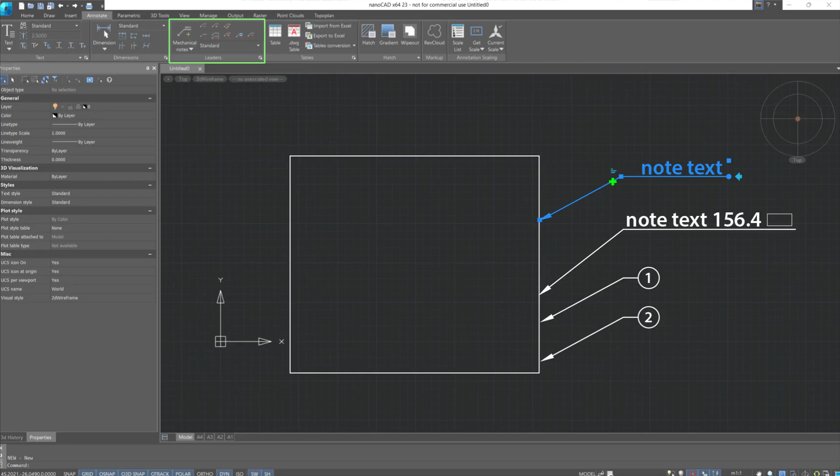Mechanical notes are a mandatory element of drafting. They appear as mechanical notes of an element, containing specific information about a certain part of a structure or construction. Let's examine the main functions of mechanical notes provided by the NanoCAD program.

We'll also create a multi-leader style and identify key functions in the Mechanical Notes editor. The first Mechanical Notes button offers 8 positions. Each of them has its name and a depiction of how they will look on the drawing.

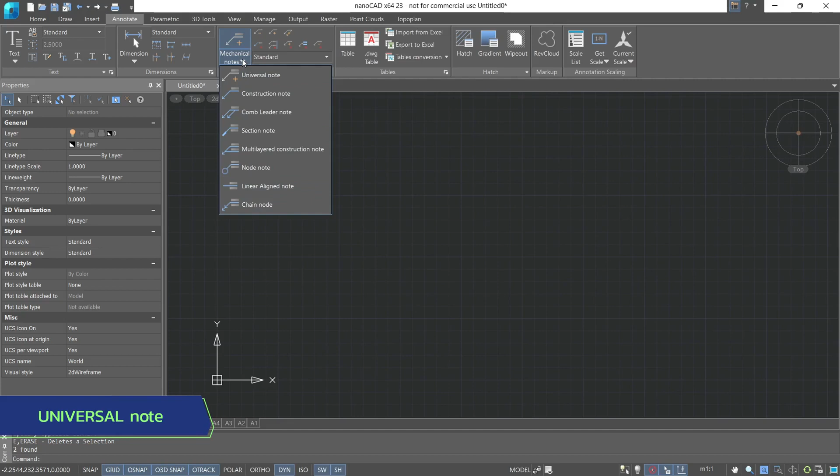Basically, the name of each sign speaks for itself. We'll first use the universal note. Let's arbitrarily construct a rectangle.

Call the universal note, after which the following dialog box with function settings will open. Settings like Add String, Remove String, Simple Note or Multiline Note, Frame, Types, Arrow Formatting, Text alignment, and additional tools, for example, Insert Special Symbol, Notebook, Match Properties, and Add Extension Line.

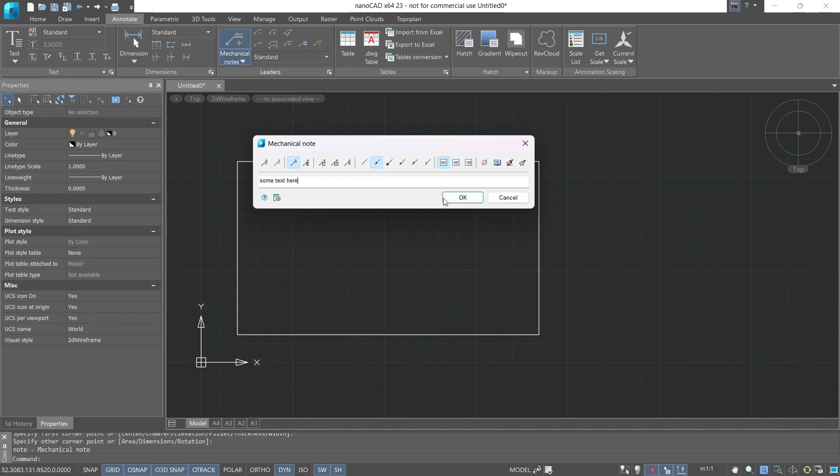Let's write the text in the field. Then we'll specify a point for insertion on the object and continue editing.

The Mechanical Notes contains a rather extensive list of editing grips. The first of which allows changing the type of arrow. Next, we can add Mechanical Notes lines using this plus.

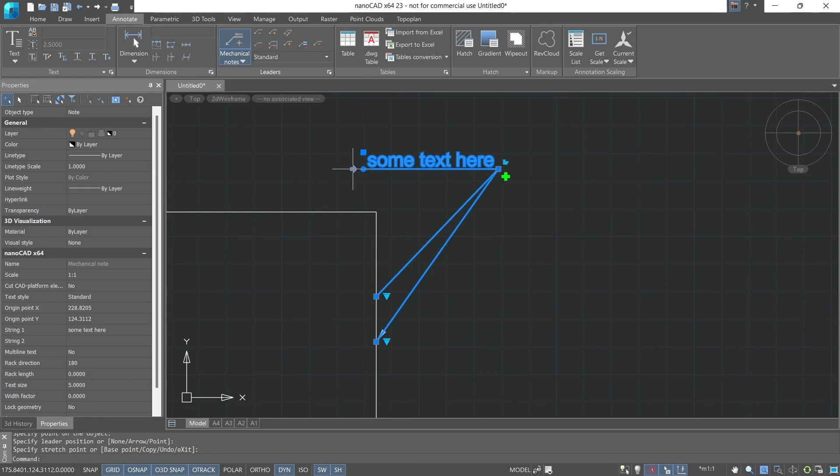Change direction in the Mechanical Notes shelf. Edit the rotation angle. Stretch or narrow. And align text.

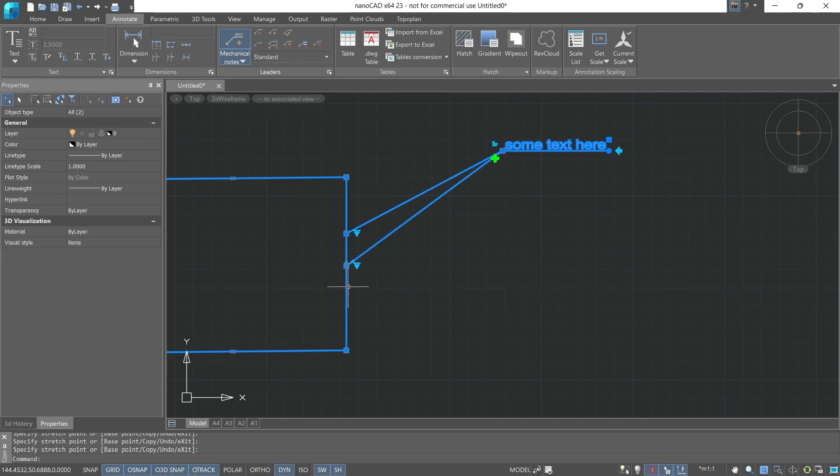Also, the first Mechanical Notes line will always be associated for the element which information it carries. This also applies to multi-leader. Now, let's continue further to explore the functionality of the next dialog box.

Apart from everything else, we can use the context menu by clicking the right mouse button and can link this mechanical note to the text, pick the property from the drawing, and insert objects. Let's use the command Pick from Drawing.

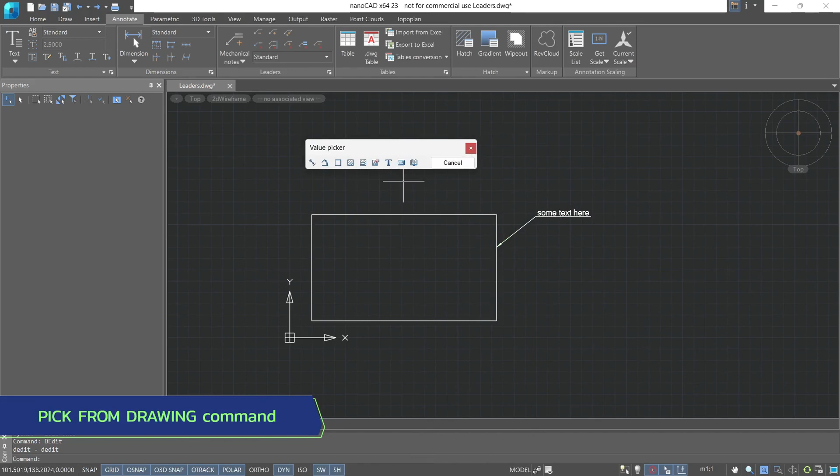For example, take from Property. Choose from Properties. Let's click Area. Confirm the actions. And close the window.

When changing the contours of the rectangle, this property will always automatically update, which is very convenient. We can also embed drawings into the Mechanical Notes line.

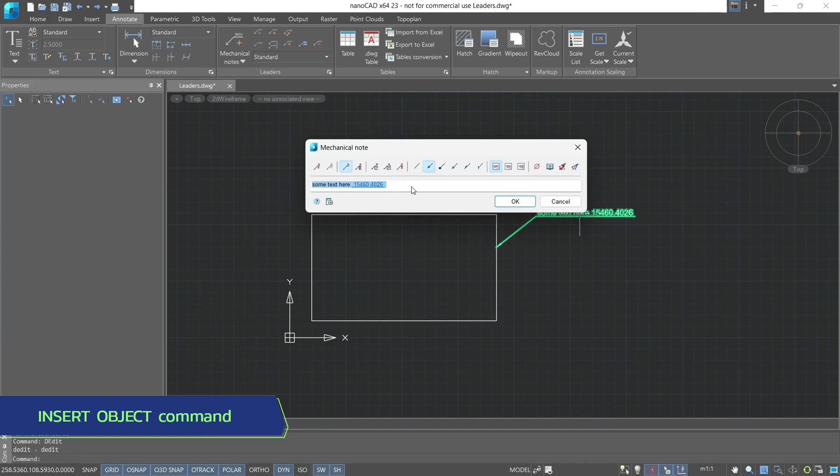Let's try to insert object. Select this rectangle. Right-click on the geometry. And use Zoom to Text Height. Confirm the actions. And we see how our geometry was embedded into our line.

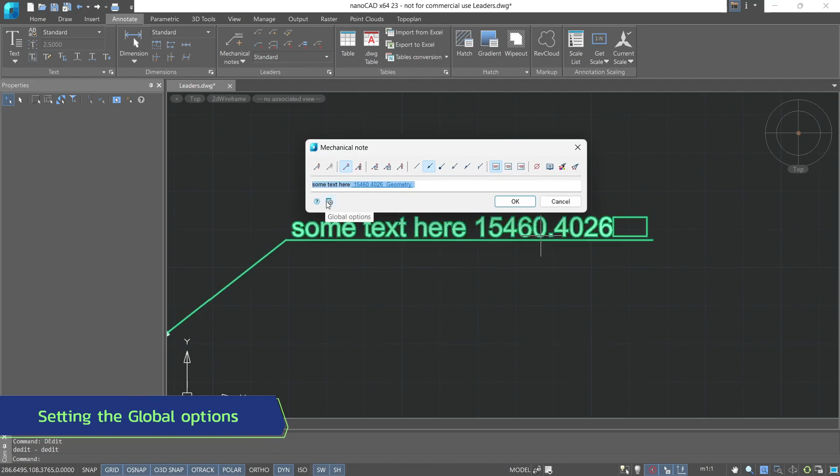Besides, we can directly go to Global Options and set properties for each type of Mechanical Notes, which will later be used by default in creating the Mechanical Notes. We can set the settings for Mechanical Note and also for its text. Confirm the actions. And we can see how our text looks like.

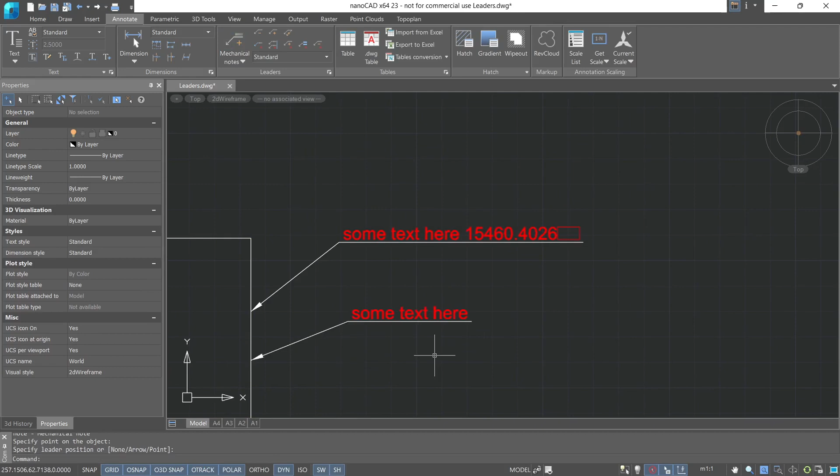There are subtypes of Mechanical Notes. They are intuitive, so let's not delve into each of them. We can see that the next dialog box with parameter settings looks similarly and contains the settings that were in the previous Mechanical Notes. Now let's create a multi-leader.

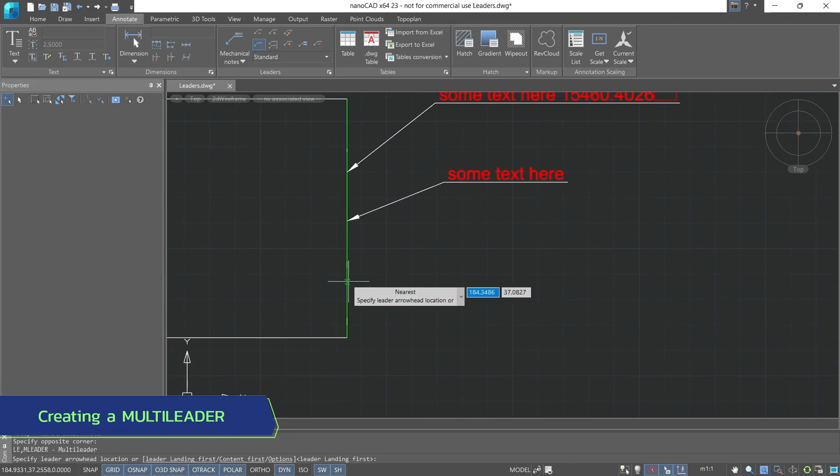Its main difference is that it opens a text editor. To finish the command, you need to click the left mouse button on the drawing. Also, we can edit from the Properties panel, or create a new style for it.

Continue. After which we can make changes to the leader format, in the leader structure, and in the content. The only thing to say here is that you can replace a straight line with a spline, but it's inconvenient.

We will leave everything here unchanged. For the leader structure, we leave everything as default. And in the content, instead of text, we can insert a block.

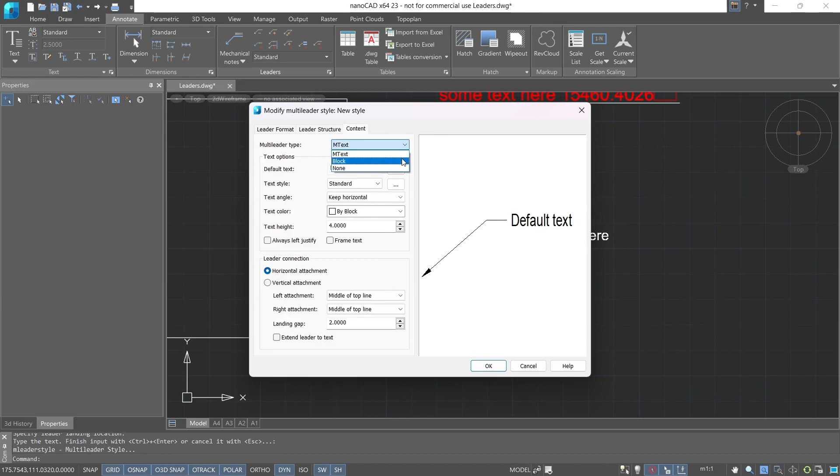Multi-leader type block. Source block. This list already contains several types of blocks. Let's use the circle block. Attachment center extents. OK and close.

Let's verify that we've set a new style. Use the multi-leader. And instead of text, the edit of attributes will open. Specify the tag number, it will be number 1. Approve the actions. This is how the mechanical notes will look with a block instead of text.

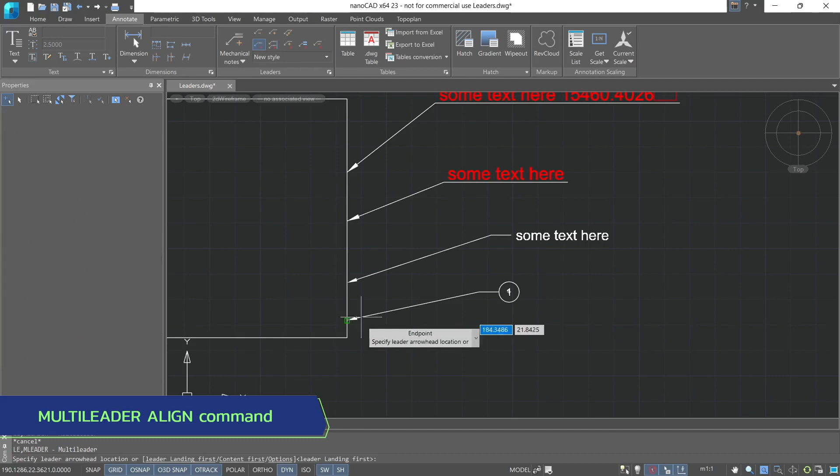Now the alignment of the multi-leader. We need to create another multi-leader. Select multi-leaders. Confirm the actions, and choose the multi-leader for alignment.

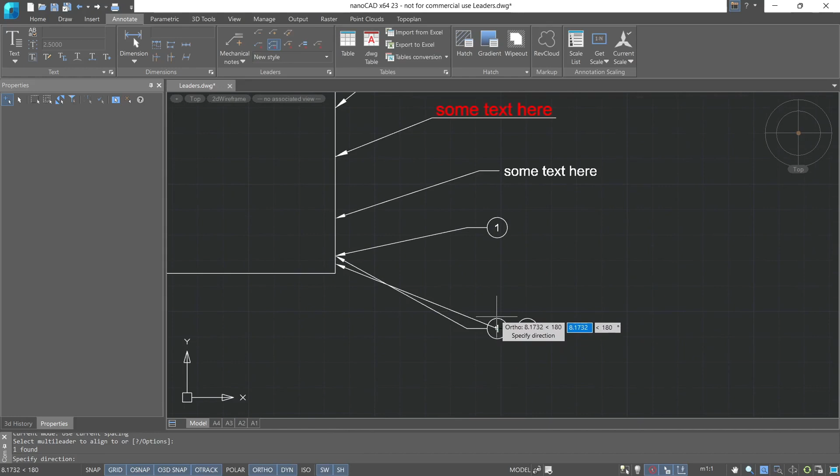For convenience, you can use the ortho mode and align the multi-leaders to a strict vertical line. Also, to call out in mechanical notes, we can call the note command. And for multi-leaders, we can call the command LE, or mleader.

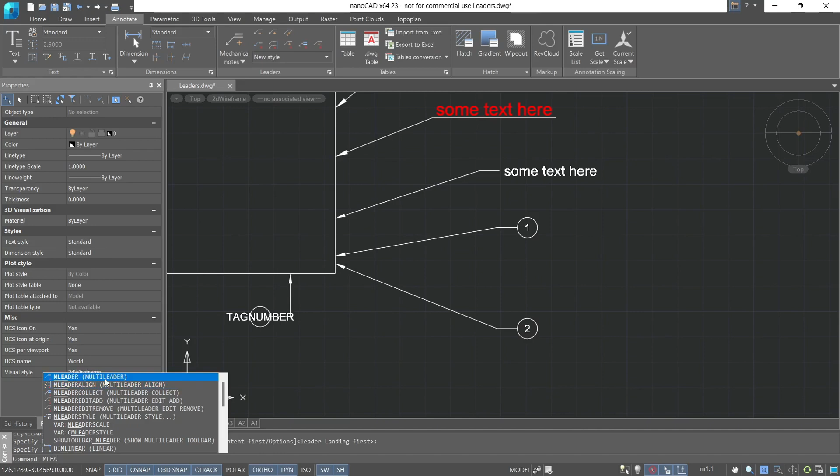That concludes our lesson.